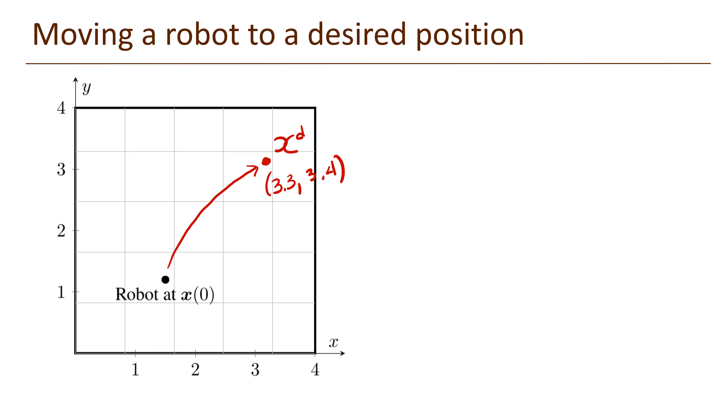Our challenge is how to move from the initial location to the desired location. For that, we assume that we can control the robot velocity. The control input is denoted by U.

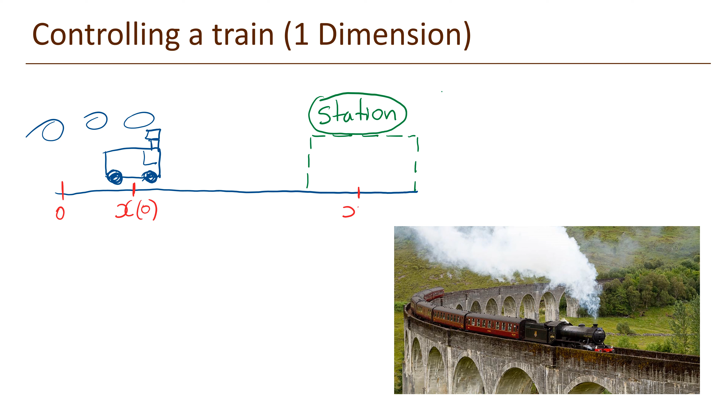To simplify the problem, we start studying a one-dimensional case. This is a train located on a track, and we know its position with respect to a reference. We want to move the robot to a desired location, in this case the station, or in other terms, the location XD where we want to drive it.

Our control input is also the velocity, but in this case it's a scalar value that determines how fast the robot is moving on the track.

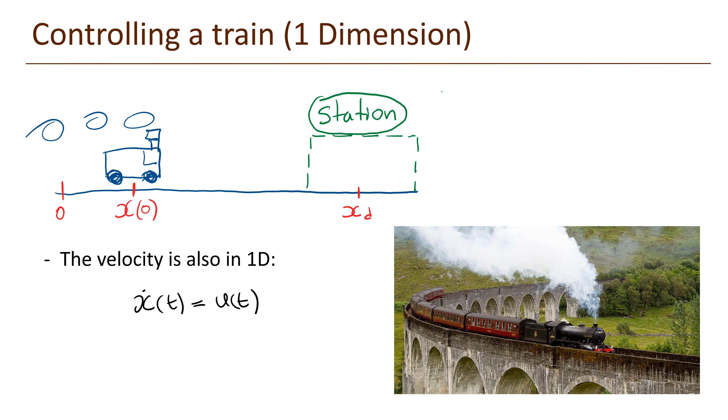I asked students about how to stop the train at this station, and I heard quite interesting answers. The first answer was about putting strong magnets at the station. That is a very interesting solution, actually.

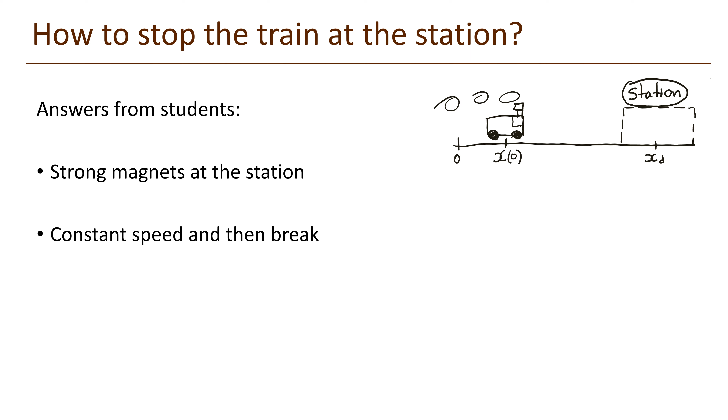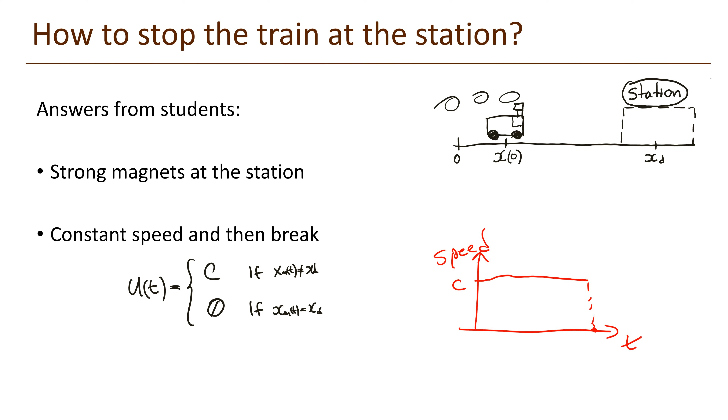The second one is about driving at constant speed, and once you reach the station, you just brake. We can write the control input for that: drive at constant speed, and once we arrive at the station, we brake. If we plot time versus speed, we figure out there is a discontinuity, and that change will require a lot of energy and really good brakes.

Today, we will study two approaches. One is open loop control, and the second one is closed loop control.

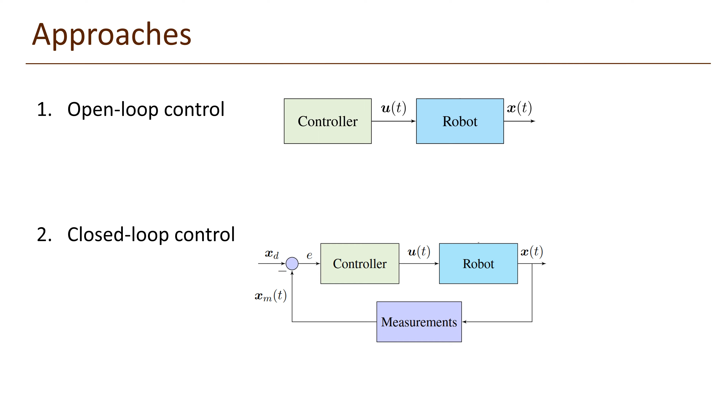Our first approach is the open loop control. We define a control policy that does not depend on the feedback at every time step. This is very useful for fast actions for a short period of time.

One example starts by describing an error, or distance to the goal, that we need to drive the robot. We compute the error as the desired location minus the current location, and then create a control input that moves at constant velocity for a certain amount of time. That amount of time can be computed by dividing the distance we want to travel over the velocity we are traveling.

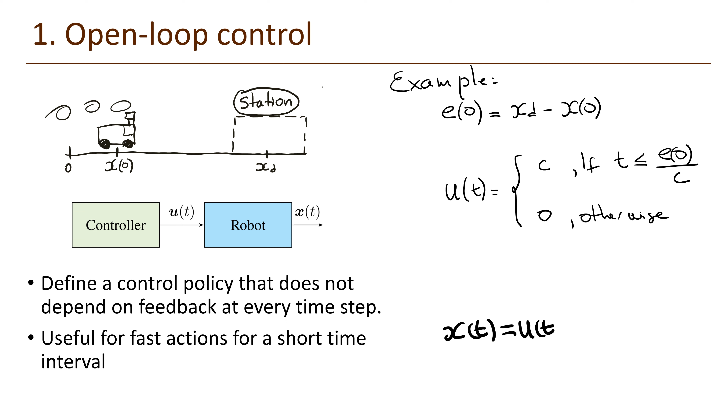Technically, that will take us to the station, so after that time passes, we can just stop and do anything else. This is a variation of the student's controller, and it seems like it will work. In theory, if we have a differential equation like this, where velocity is our control input, that will work very well.

However, these types of approaches, and not only this example but in general most open loop control techniques, don't take into account disturbances. If a disturbance comes and pushes the robot a little bit before or after, disturbances can come from errors in the engines, in the actuators, errors in the wheels, or disturbances from the environment such as wind, that will make the robot reach different locations than the desired one.

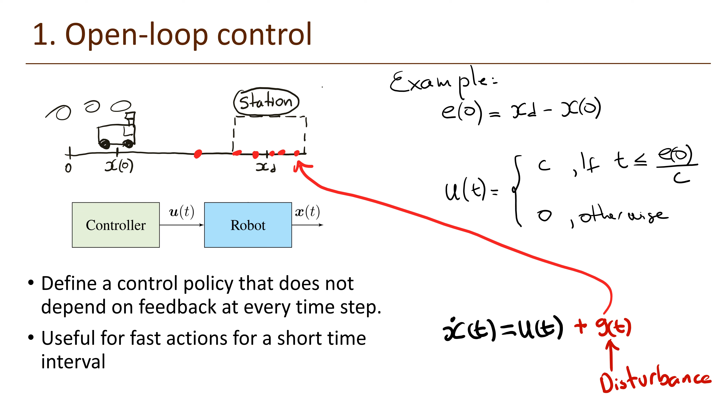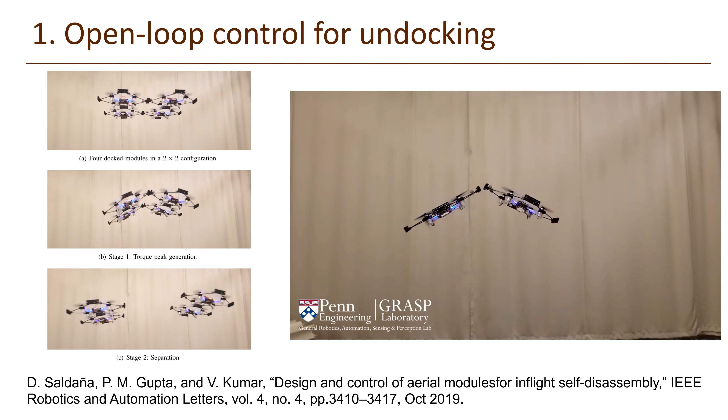In our research with aerial robots, we have been using open loop control techniques for undocking. Imagine you have two drones connected using magnets like the ones in these pictures, and they need to separate. We used an open loop technique that creates a high torque towards the left and another torque towards the right. The combination of these two torques makes the robots break the magnetic connection so they can undock in midair.

Introducing measurements can lead us to a very accurate behavior, and we can correct the errors we are having over time. So we don't have to wait until the end to realize we didn't reach the position where we wanted to be. We take into account the measurements and subtract them from the desired location - that is the error we want to study here.

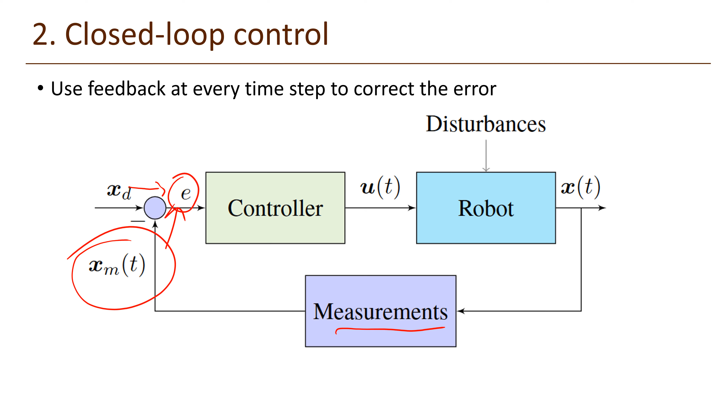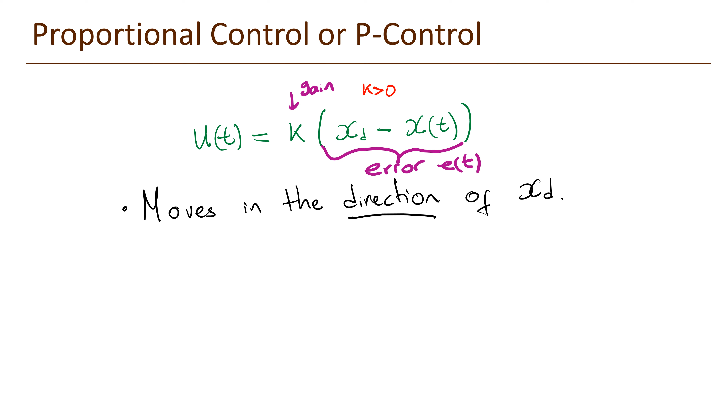We introduce our simple technique, the proportional control. It takes into account the error, the difference between the desired and current location, multiplies it by a positive constant, and using this simple controller we can drive the robot toward the goal. The robot will always move in the direction of the desired location, and its speed will be proportional to the distance to the location. This is a really good technique.

This works very well in practice and also in theory. We will show that it actually works analytically in a different video.

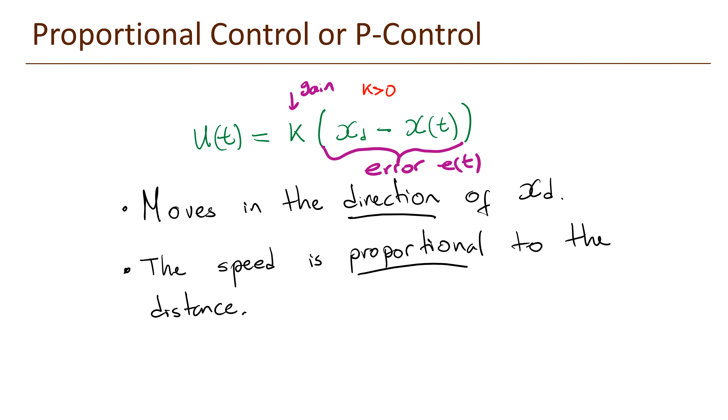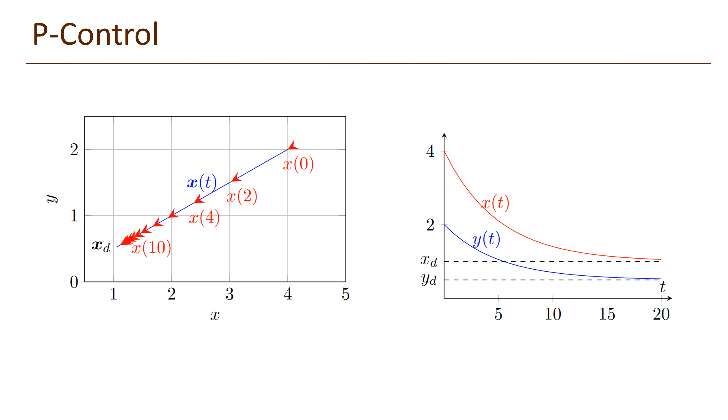We can use the proportional controller to drive the robot towards a desired location. This is a two-dimensional problem, but it's a simple extension of the single-dimensional problem. Controlling X and Y independently, we can drive both X and Y towards the desired coordinates. In this plot, we can see how the exponential function decays very quickly towards the desired location.

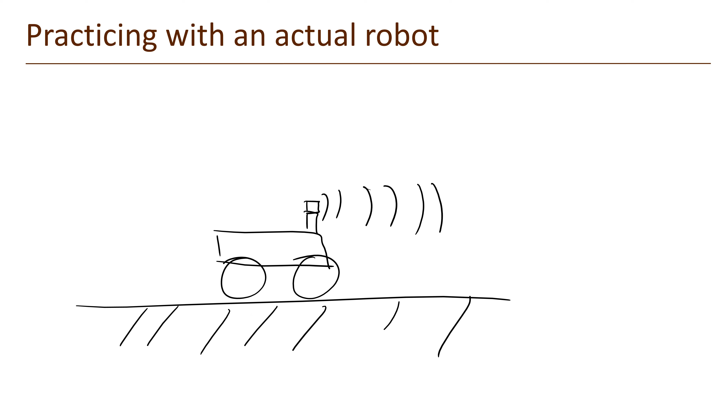We can actually put this method into practice and see how it works with an actual robot. If we have a robot with an ultrasonic sensor or any distance sensor, we can come back to the single dimensional problem where we have a wall and we want to be at a specific distance from it.

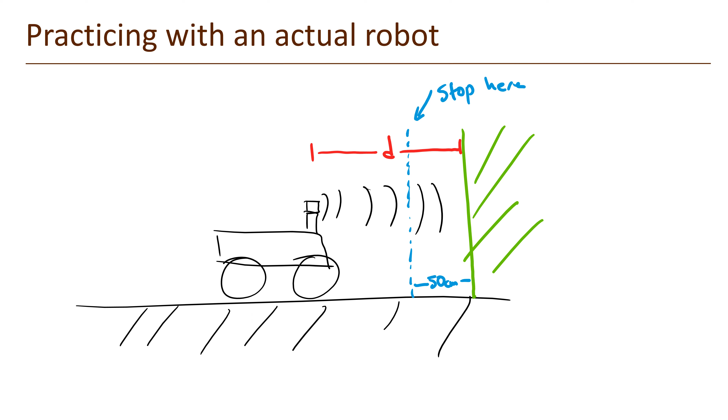For example, we want to park at home. The sensor will give us the distance and we will set the desired distance. Let's say we want to be at 50 centimeters from the wall. Then we can use the position control to drive the robot and actually stop when we reach the desired location.

As further reading, there are multiple properties that can be studied. The properties of the controller are stability - we want to check if a controller is asymptotically stable or exponentially stable. I won't go into details here, but you can check the nonlinear systems books by Professor Khalil and see that the P controller is actually exponentially stable in the settings we describe in this session.